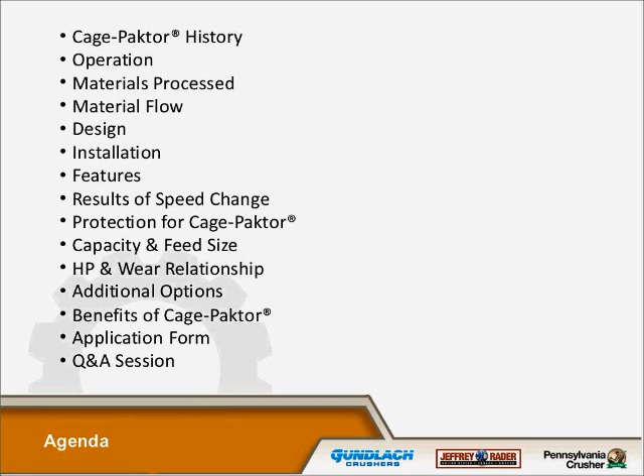The Cage-Paktor was developed in 1962. Actually, there are some early opposed shaft models still operating down in Florida. The Cage-Paktor was designed to replace more expensive machines like cage mills, rod mills, ball mills, hammer mills, impactors and so on. The Cage-Paktor sizes material by impacting it, and it was originally an opposed shaft style machine.

The Cage-Paktor produces a good 99% passing 18 mesh, 1 millimeter, on a 50 pounds per cubic foot material.

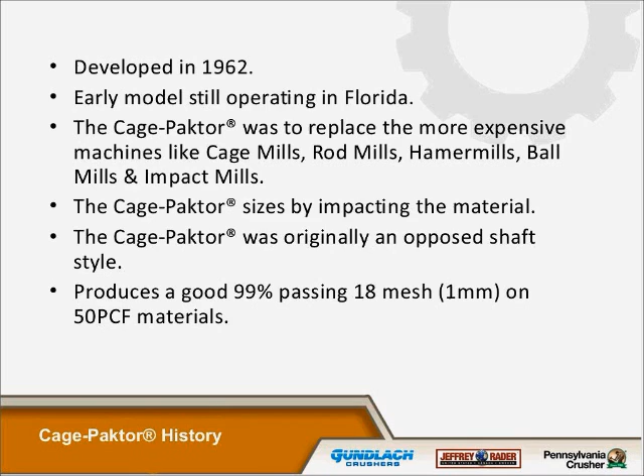The cage mills use 2 counter-rotating cages with striking plates spaced about the periphery to impact and crush the material. Material is fed into the center of the cages and then migrates outward towards 4 rows or more of impact zones. The material then discharges freely out the bottom of the crusher.

Product size is controlled by varying the peripheral speed of the cages. As material passes through each successively larger diameter row of striking plates, the higher peripheral speed puts more energy into the oversized particle than the already-to-size particle.

As a result, the crushers allow very good control of the product top size and generate much fewer fines than other impact type crushers. In addition, since no screens are used in the crusher, no attrition grinding takes place, which is a fines generator. Wet material can be crushed without a problem since there are no screens to plug up.

Tramp metal protection, such as a good magnet, is needed in the feed stream ahead of the Cage-Paktor.

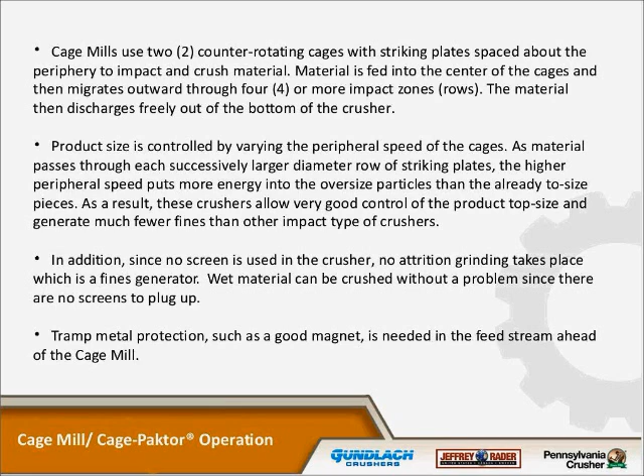Here's a list of materials that we have processed in the Cage-Paktor. I'm not going to read them all, but you can see there's quite a few different types of material that the Cage-Paktor can process.

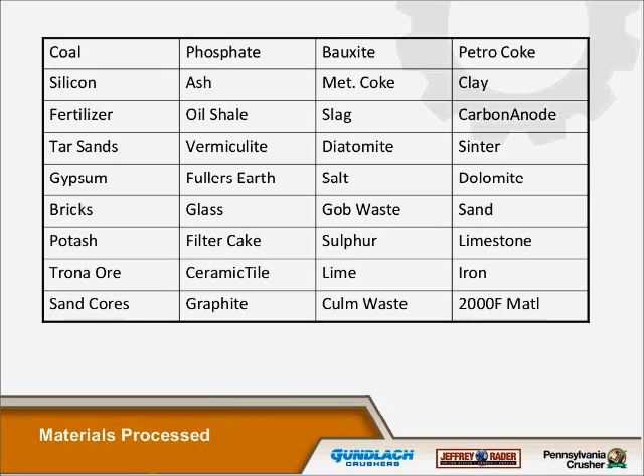As I mentioned earlier, the Cage-Paktor crushes internally. Material enters through the feed chute, past the feed ring, into the center of the cages, and the material has to go through 4 rows of impact to exit the bottom of the machine.

Basically, the faster you spin the machine, the finer it makes the material. Each cage is turning in an opposite direction.

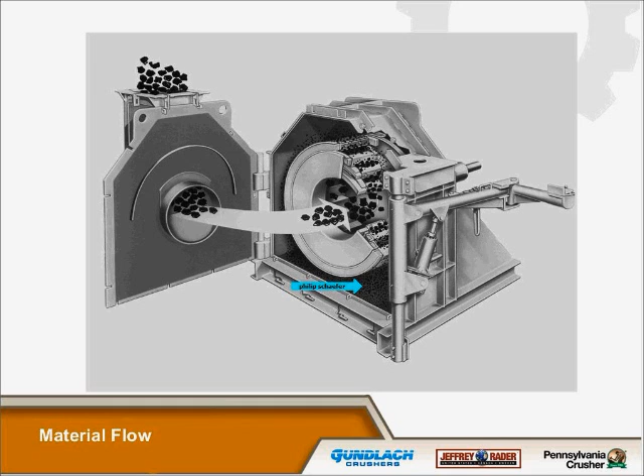Looking at this view, the material enters here, goes through row 1, 2, 3, and 4, finally exiting the machine. Each row is spinning at a faster speed. The small cage, row 1 and row 3, are turning in this direction. Row 2 and row 4 are turning in the opposite direction.

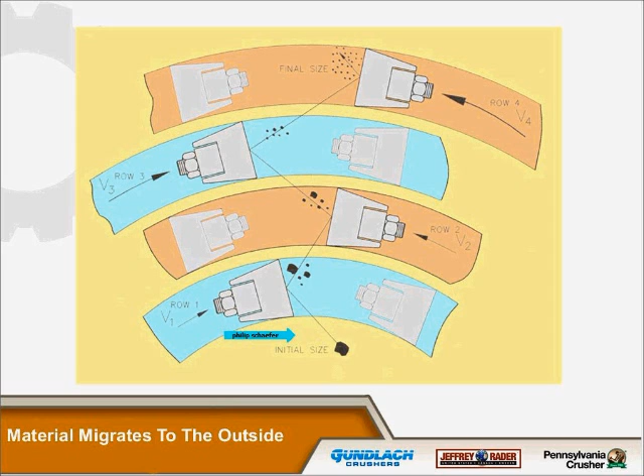As you can see, the striking plates have a unique shape and design. This helps reduce horsepower consumption.

The shaft within a shaft design allows the cages to turn in opposite directions.

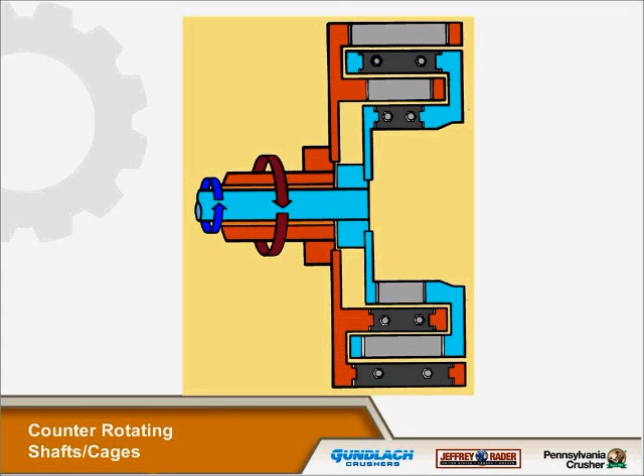The shaft design also allows a variable frequency drive to be used, normally placed on the large drive motor. If the product changes or needs to be changed, you can vary the speed.

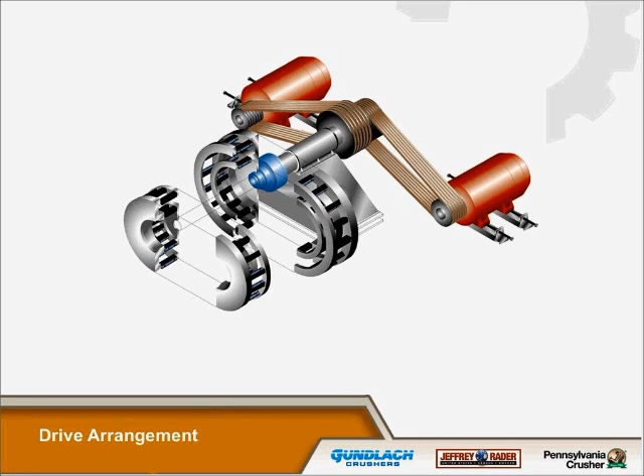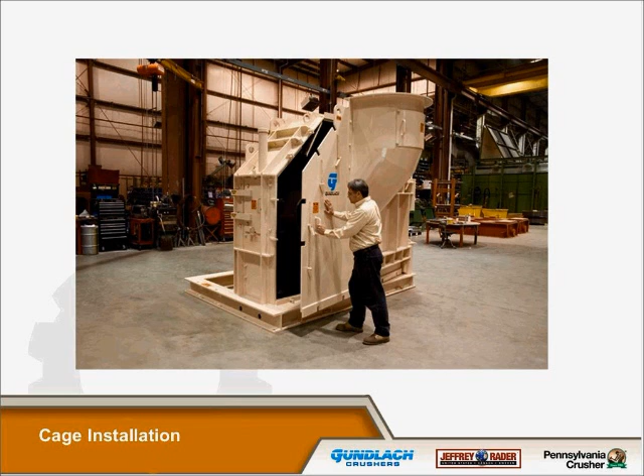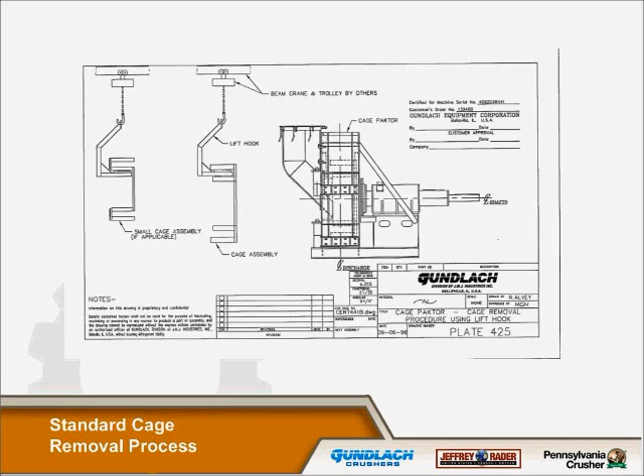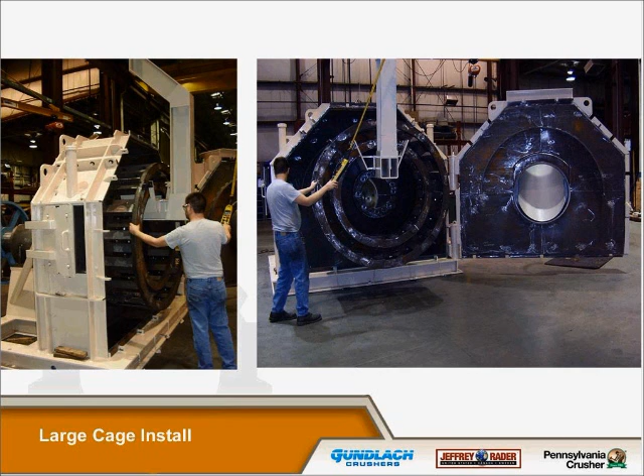Here are some other photographs of the cages being installed with the lifting hook. As the Cage-Paktors get larger, the lifting hook gets larger too. The different pads are changed depending on which cage you're lifting. It's a very safe device that works very well with your overhead lifting hoist.

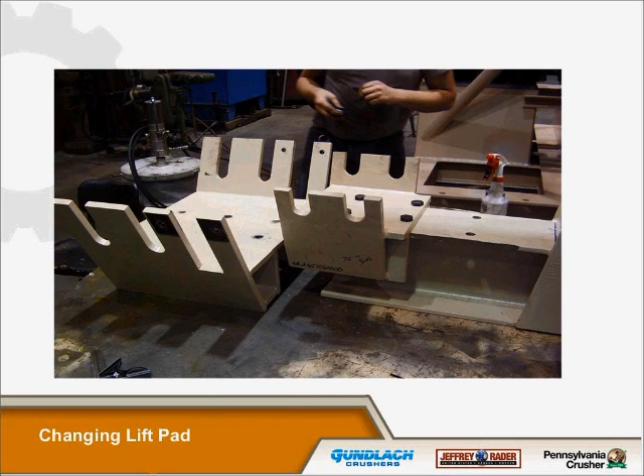Photograph showing the changing of the pads for the large cage versus the small cage, and the final installation of the small cage into the large cage. Very easy to be done with one person.

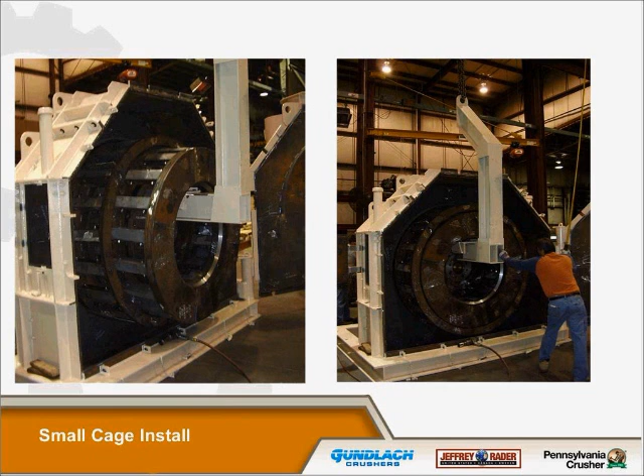It helps locate the bolt holes, and you can get in there very easily with an impact wrench and a torque wrench.

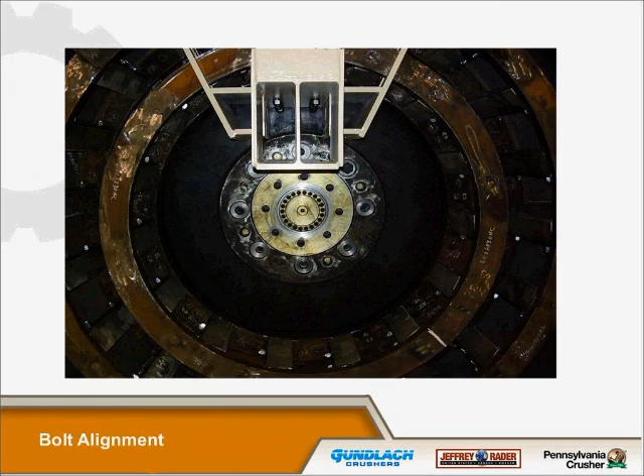An upgrade to that is an option of the cage jack. The cage jack is an integral part of the machine if you purchase it with the machine. It is a very nice device, mounted right to the machine. You can change cages out in 4 hours or less.

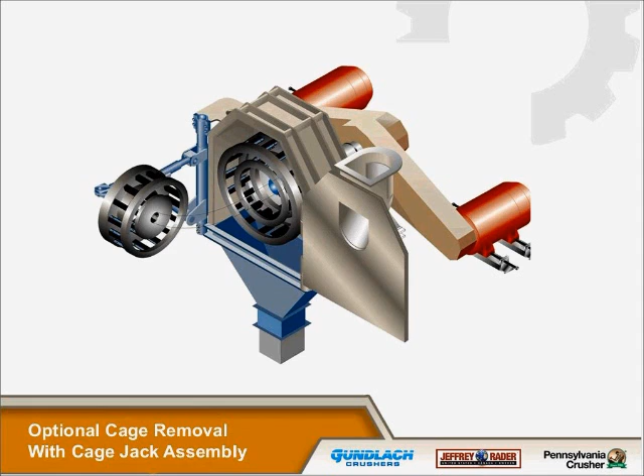The cage ring, when the door is closed, allows the material to go into the center of the cage and not bypass the cages.

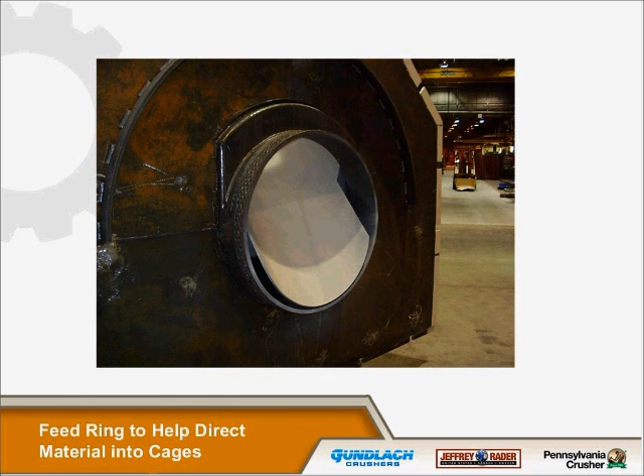This picture is showing a 1C3R machine. This particular model is a 50-inch, which is the diameter of the large cage. The 1C3R is used a lot of times for finer or more friable material.

We eliminate a row of impact. So you have one rotating cage and one stationary cage and one motor.

The 1C3R also comes with a hinge door and an access door on the side so you can monitor cage striking plate wear.

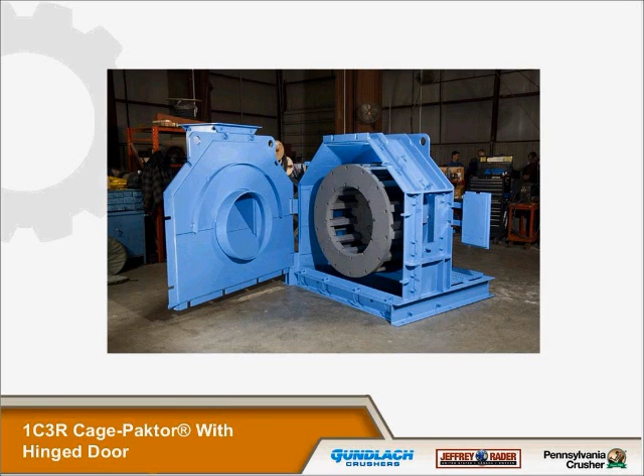These are some features showing when we get into wetter applications, we can still produce the product and still maintain the speed and the product size. We'll use air cannons to help keep material dislodged, and use peripheral scrapers.

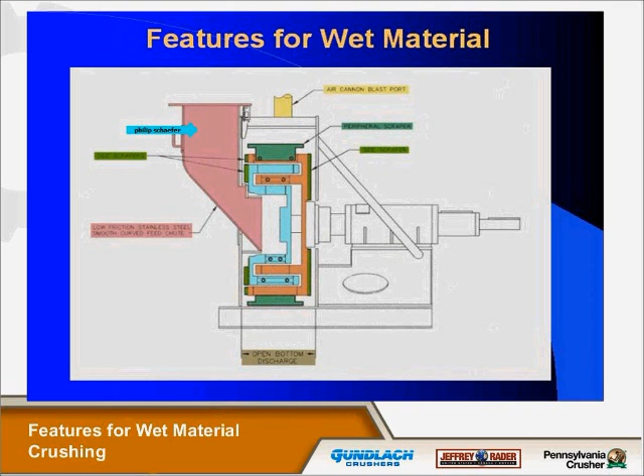Let me back up one here.

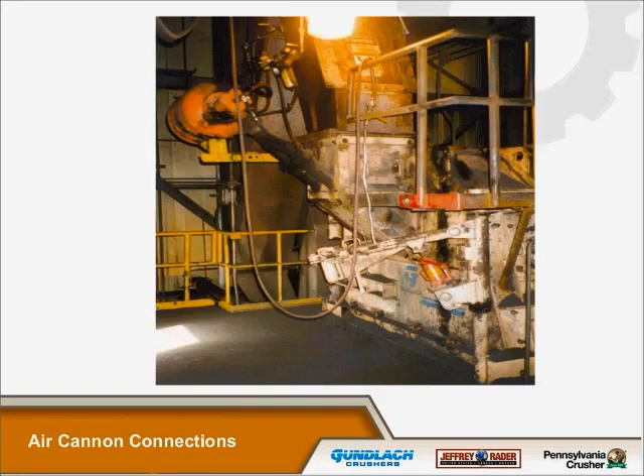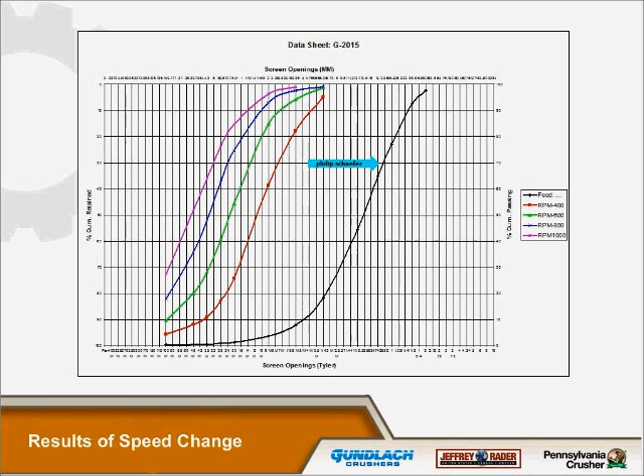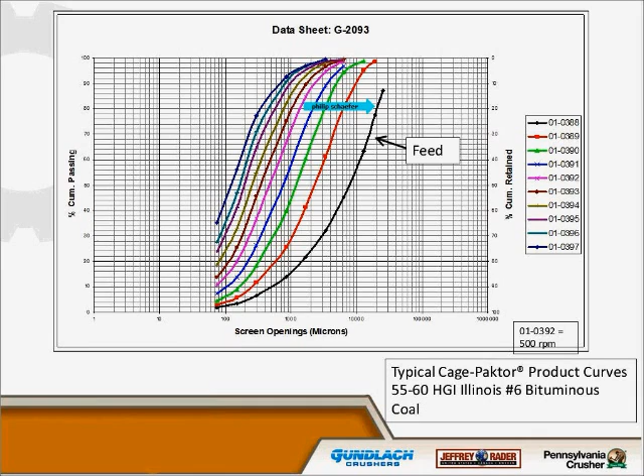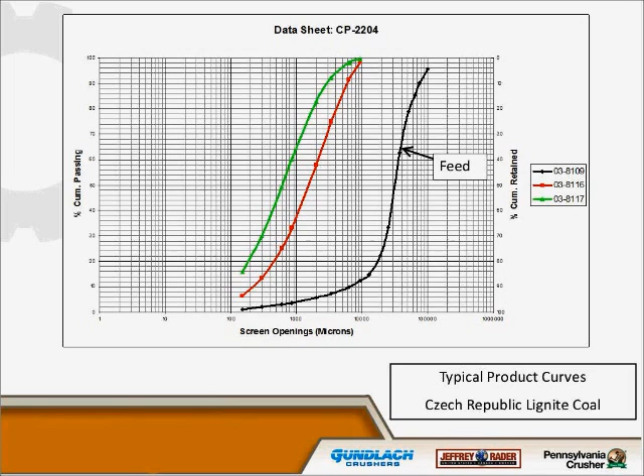We'll have another presentation with a little bit more detail on the posimetric later on. But basically, protecting the machine is very important with a magnet metal detector, restricting airflow, and having the proper discharge out of the machine. Again, it's an inefficient fan, so you are displacing air.

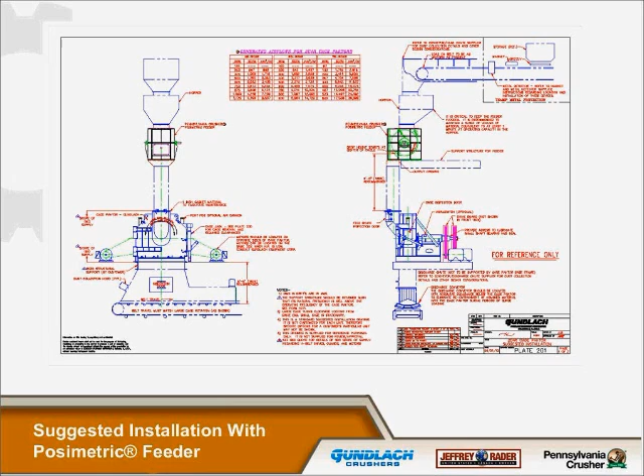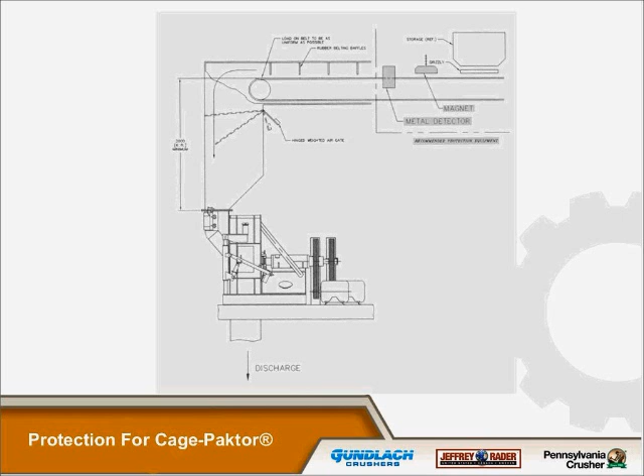Direction of the flow out of the machine should go in the direction of the discharge conveyor, and there should also be enough distance between the machine and the discharge device to help displace some of the air and the material so it comes out of the machine properly.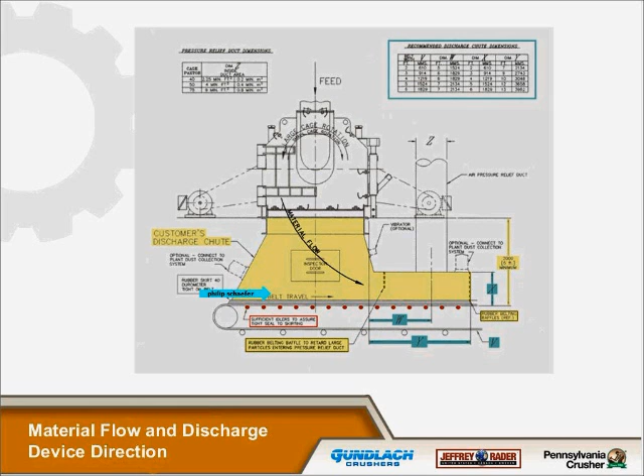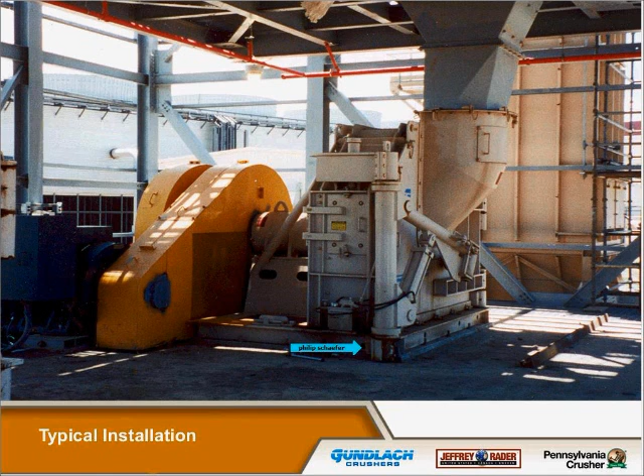Some of the different ways that the drive can be connected to the Cage-Paktor. We'll send these out, and customers can choose which drive arrangement they would like.

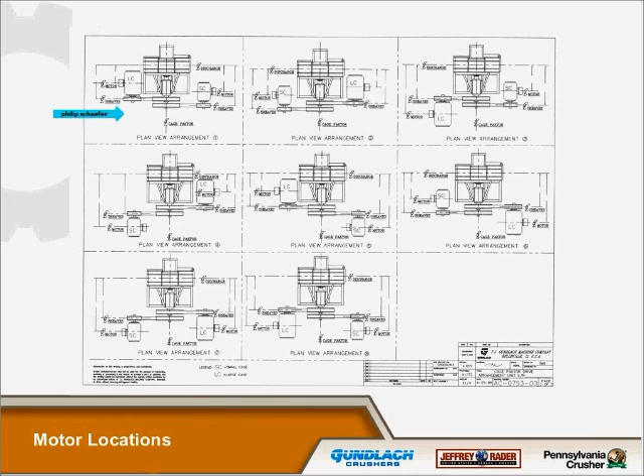The different sizes of the machine: we have the 20-inch cage mill, and that can take up to about a 1-inch, 25 millimeter material. But as you can see, the cage mill does have a slight restriction of the size material going into it. As you saw in the earlier slide, that row 1 can only take so big a material. So either you pre-crush the material so the Cage-Paktor can accept it, or you get a larger Cage-Paktor with a larger opening. So we manufacture the 20, 30, 40, 50, and 75 inch. That's the diameter of the large cage.

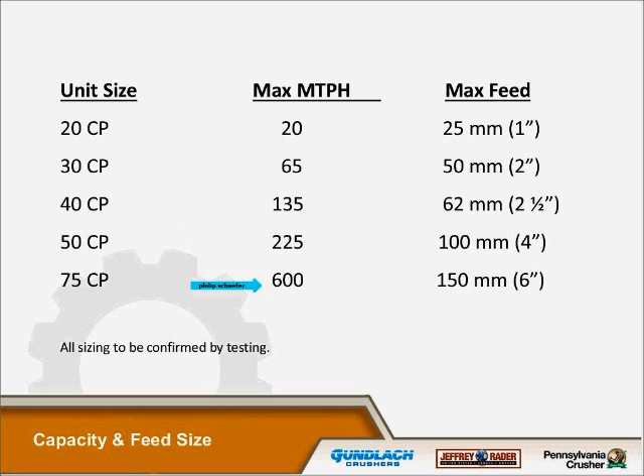As RPM increases, horsepower to tonnage increases. Horsepower to tonnage is the same for all materials at a given cage RPM. At a given RPM, friable material will crush smaller than harder material. Product size stays relatively constant through the life of the striking plates. Horsepower tonnage goes up as striking plates wear. When horsepower goes up dramatically, let's say 20%, striking plates need to be replaced.

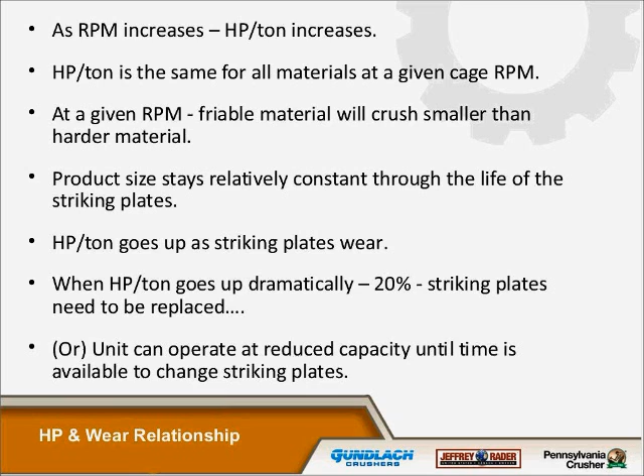Unit can operate at reduced capacities until time is available to change the striking plates or cages. Spare cages are recommended. As you can see, you can have spare cages sitting there available, ready to go, balanced, whether it's static balanced or dynamically balanced. They can be in the warehouse ready to go.

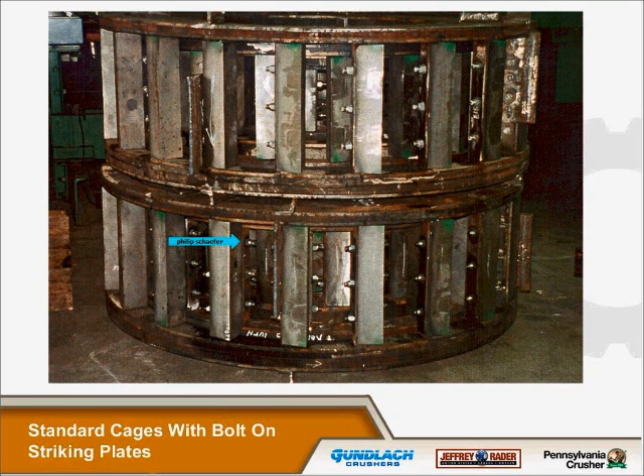Again, this is a picture of the way that the striking plate bolts on. This is the bolt-on design. They come in all different types of material.

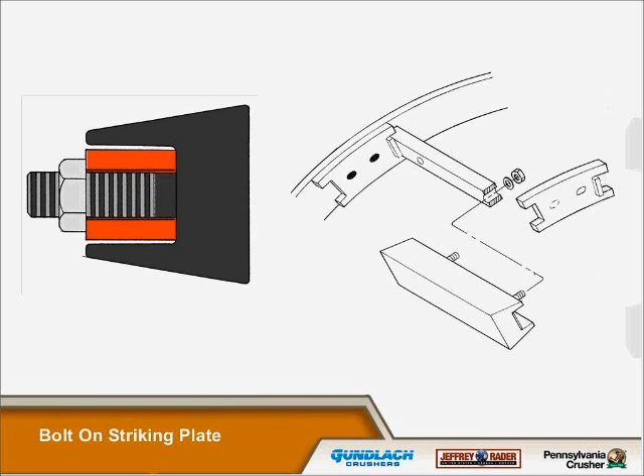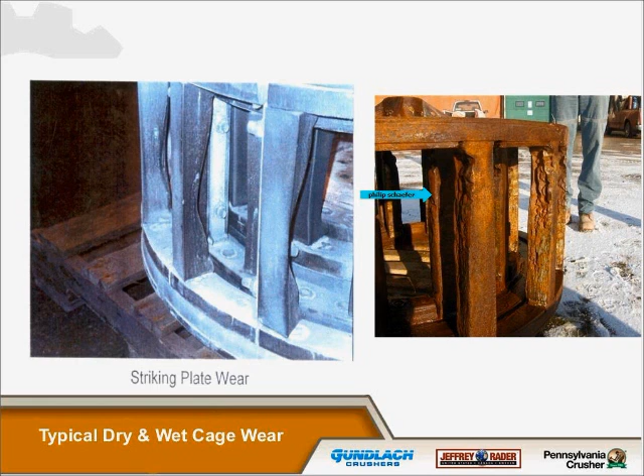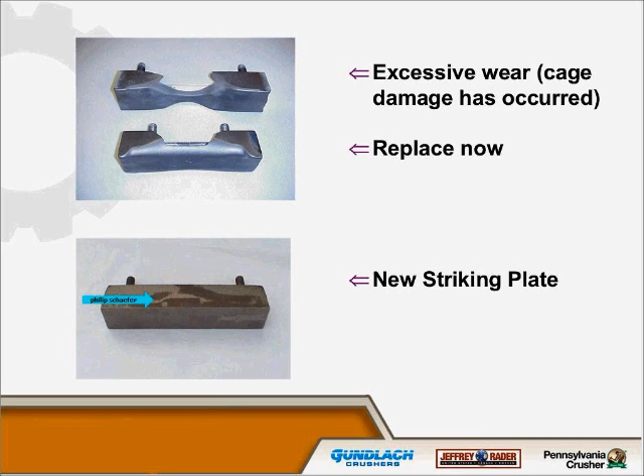Some of the options are ceramic lined feed chutes. If you have some real abrasive material, this works very well.

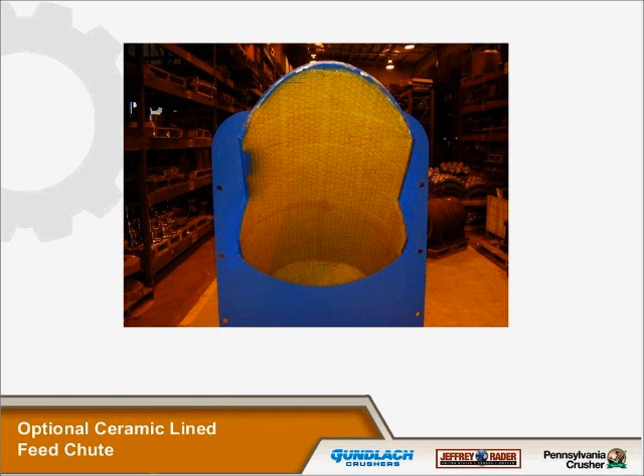Another option is a common base. Common base would support the machine, the motors, the guards, the lubrication system, disconnects, and any other thing you might want to purchase with the equipment. It also helps us control where the drives are located.

Not all the time, but sometimes these can all be lifted up in one section, depending on the size of the machine, and put in place, and it makes for a real nice package.

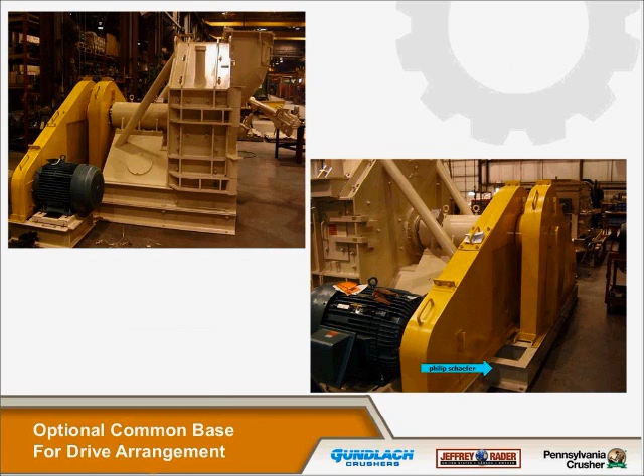The optional fabricated cages were developed to have a cage that was a little more forgiving if you get a non-crushable in it. The other cages, the bolt-on type, are very good cages. They're just not as forgiving if you get a non-crushable in the machine.

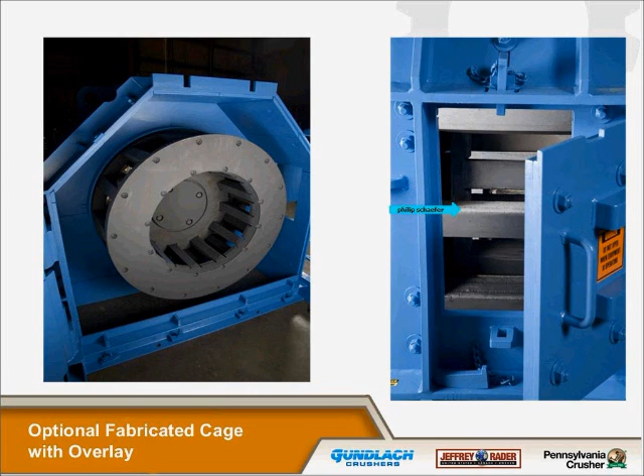I was talking about this a little bit earlier, a stainless liner, a rolled liner inside. This was going to be a real sticky application, so we had the rolled liner, scrapers, air cannon ports, and it was working very well.

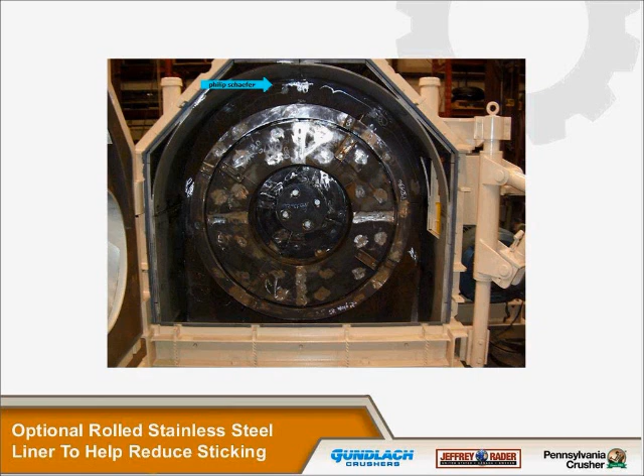A couple other things that can plug up a machine is wood. Sometimes that can get in there, and for our larger lumps, we can put in a breaker bar, which is a stationary arm that's attached to the feed ring. When you close the door, it stays stationary and the cage rotates around it. It acts as a breaker bar, scraper, whatever you want to call it. It works very well. Again, that is an option if it's necessary.

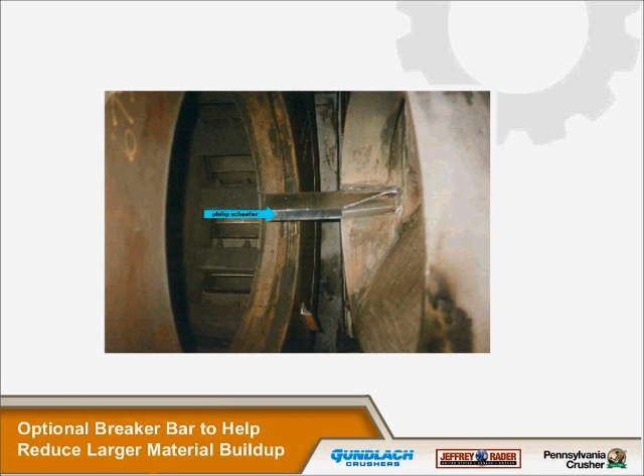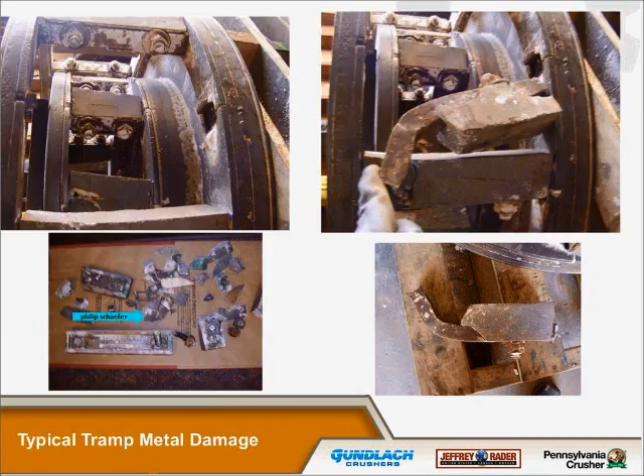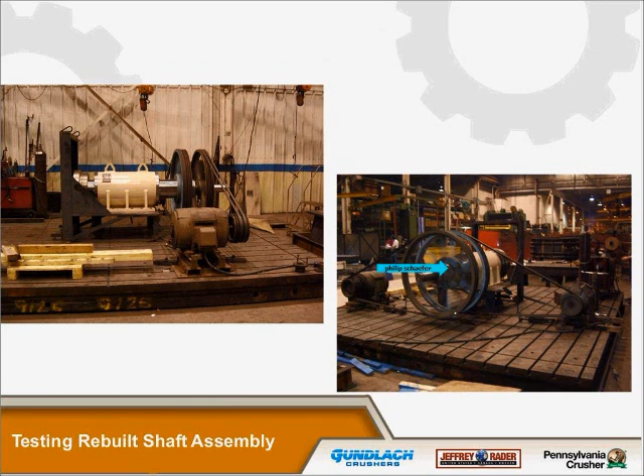We also have rebuilt shaft assembly. We can rebuild shaft assemblies in our facility, and it is recommended to send those in and have them rebuilt. They are very difficult to rebuild at times. When the machine fails, all the tolerances have to be checked. So we rebuild it, test run it, and ship it out with a manufacturer's warranty on it.

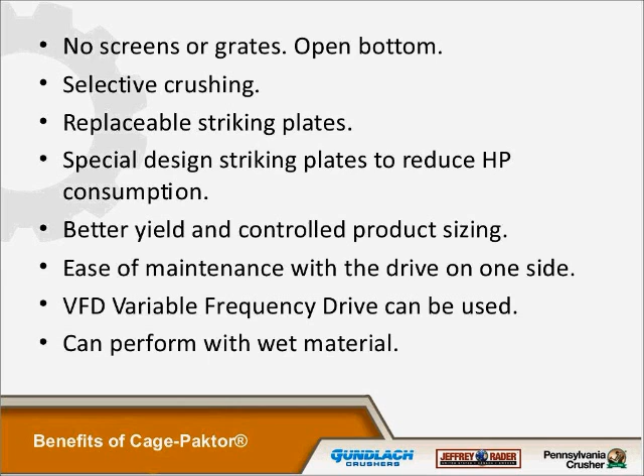With that, I thank you, and if there's any questions, feel free.